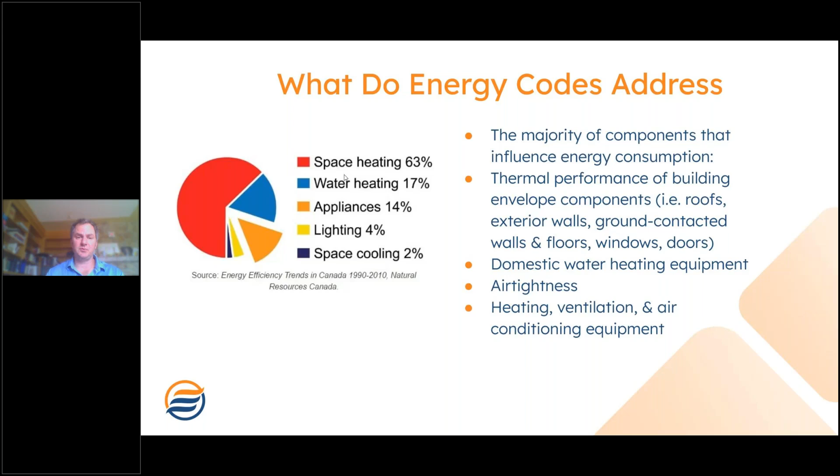It's only the National Energy Code for buildings between 9.36 and the NECB that applies to lighting, but energy codes are always interested in space heating, water heating, and space cooling. And so they're always going to be addressing the building shell, the building envelope, the thermal insulation parameters, the space heating and cooling appliances and equipment, and the domestic hot water heating.

So this slide sort of reflects the crux of what we're trying to talk about here. So why are energy codes a big deal? I mean, biased from an energy consultant perspective, but when employed with intent, they're like the gravitational force that pulls the different disciplines together. Because, as we just discussed from the last slide, energy consumption is influenced by the whole range of aspects in a building. If we're trying to achieve a particular end result or a particular performance, that's necessarily going to require collaboration and conversation, ideally at the front end, to ensure that the project is on track to hit those targets from the beginning. So in short, energy codes certainly can, and ideally do, drive an integrated design process.

So here's a slide that's basically highlights from the experts, just reinforcing that point. This is a little excerpt taken from the American Institute of Architects, where they're contrasting the benefits, or the absence of benefits if we don't take an integrated design approach. I think this is probably a pretty straightforward concept, but really it does make a difference. And the reality is that an integrated design process is just not always employed.

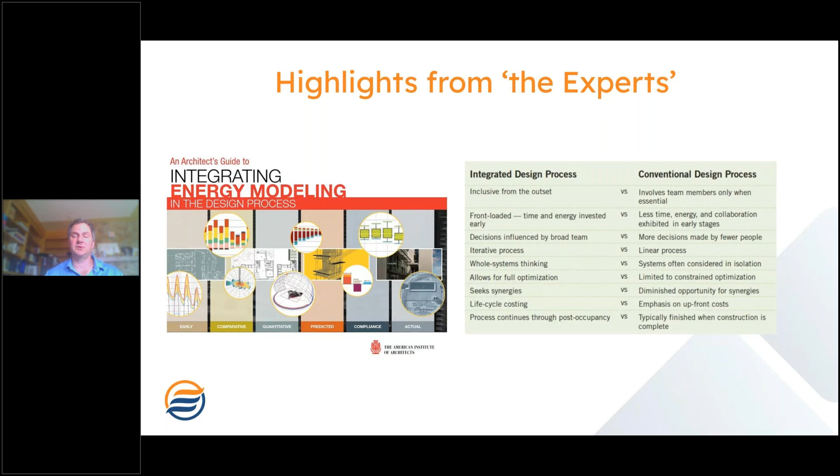Key advantages on this integrated design list that I would point to would be decisions influenced by a broad team. So even if we have an orientation towards high energy efficiency, let's say we're totally convinced that heat pumps are a great application for a building, they reduce overall energy consumption, we still don't want to be making design decisions about that system in a vacuum. This image here does a good job of pulling out the different facets and makes it a little easier to see how they would correspond.

If a house is planning to put some solar PV on there, well, how much of the annual energy do we want that solar array to produce, to be responsible for, to generate? Well, that depends on the overall building envelope's thermal insulation. And even if we've got a great technology like heat pumps, it is often the case that some of this more advanced technology is more design parameter sensitive. Air source heat pumps, for example, do have reduced output capacity during periods of colder weather. They generally have less overall heat capacity than, say, a furnace. So their sizing ought to be taken into consideration with the building as a whole.

Okay, so before we get into the discussion focused on 9.36, I thought I would just give a broad 30,000 foot level view of what's out there. 9.36 energy efficiency is certainly not the only energy game in town. For buildings that do not fall under Part 9, which I'll discuss in a second, by default, typically in most of Canada, the building would be called a Part 3 building and would be subject to the National Energy Code for Buildings.

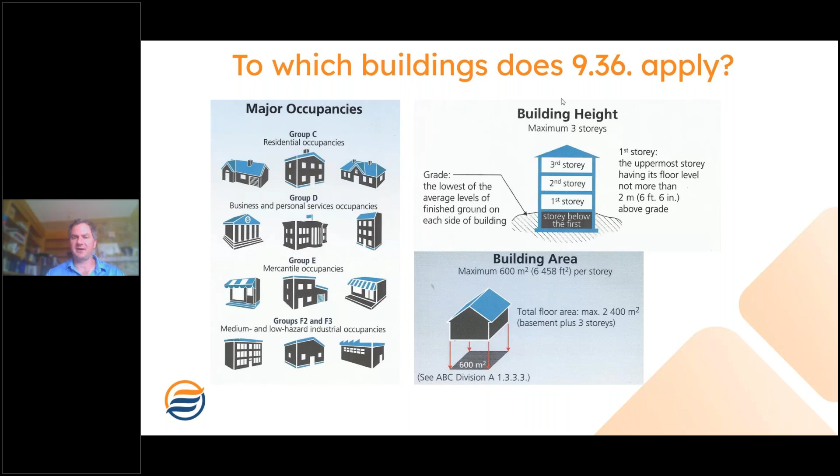So that's 600 square meters. If you had a 3-story building, you could have up to 1,800 square meters of gross floor area, but that footprint has to be 600 or less. Okay, so now we know what buildings fall under Part 9.36. So as I was saying, Part 9 is where they jumble all of the requirements for a particular kind of building into one part.

That would include a section on ventilation, a section on structural requirements, crawl spaces, all the things that fall under Part 9. Well, Section 36 of Part 9 is energy efficiency. So just to give a high level of the structure of Section 9.36, the first subsection talks about what we just talked about, what kind of buildings does this apply to, and how do we demonstrate compliance. And then the next 4 sections are about the modes of compliance.

So these modes of compliance that I'm going to discuss here next, this really is almost universally true, regardless of what energy code we're talking about, except for, I mentioned the step code, those work more on an energy budget, depending on what kind of building you have. They'll say you're basically given an energy allowance per square foot.

But for the most part, most energy codes, including the NECB, ASHRAE 90.1, generally offer these 2 modes of compliance: a prescriptive path and a performance path. And I'll get into what those 2 things mean. So prescriptive, and I'll be reiterating this point in a subsequent slide, think like prescription. You go to see the doctor, he gives a prescription. The pharmacist just adheres to the prescription, makes sure that it's followed to a T.

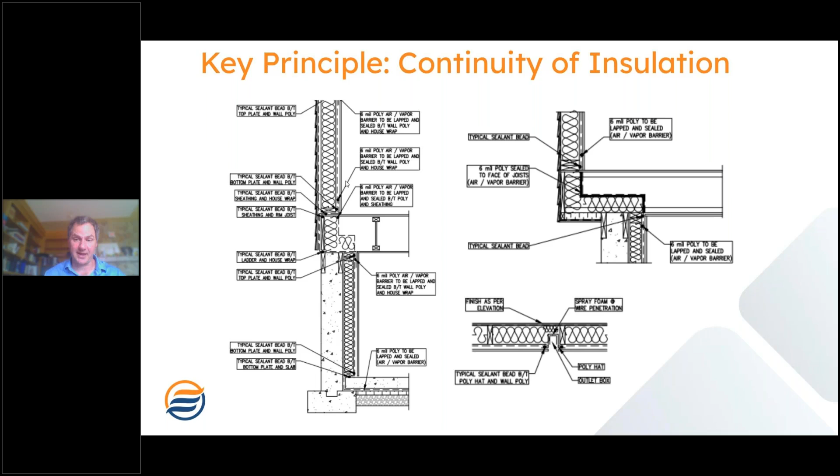The second core principle, which definitely applies to both the prescriptive and the performance, is continuity of air barrier. Actually, I didn't know this until some time ago, but ASHRAE 90.1, that American standard that's been in place for a long time, one of their requirements is actually a drawing package that has a red line section where the designer has to demonstrate how their air barrier is being maintained.

And so, air barriers is its own conversation. There's different kinds of air barriers. There's exterior air barriers, there's interior air barriers. Sometimes your interior air barrier is also your vapor barrier. But the point is, when we have this exercise from the beginning, it forces us to examine and really plan our details of how we're putting something together.

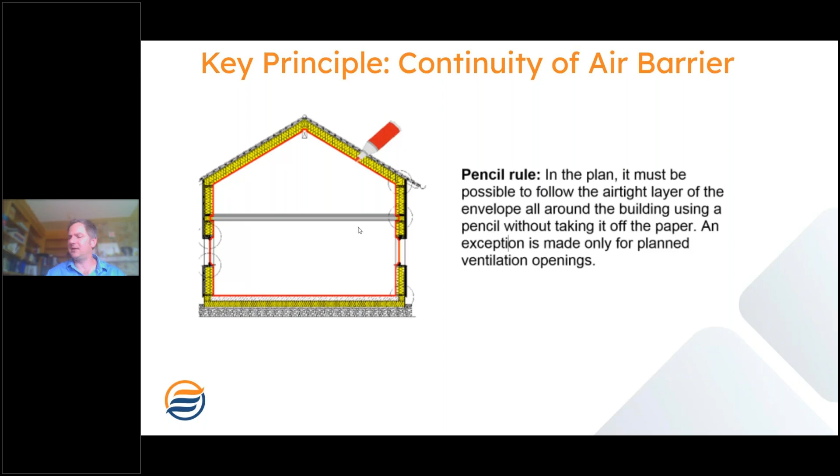So, I don't think there was ever this much focus on air barriers before energy codes were widely adopted. We know that air tightness is a very substantial contributor to energy consumption, and so this is definitely a facet of the energy codes that lead us to better buildings.

So now we'll talk about the structure. Whether we're talking about the modeling rules or the prescriptive requirements, the requirements of 9.36 are organized generally in terms of heating degree days, or in simpler terms, maybe the coldness of the location.

If anyone ever wondered what a heating degree day was, well, it's the middle of summer right now, so it's probably above 18 Celsius in most places where people are watching. But let's just say the average temperature today was 0. So 18 Celsius is the presumed indoor temperature. 18 minus the average 0 is 18. That would be the number of heating degree day points from today. And then they add that up on an annual basis, on a per location basis, based on their climate.

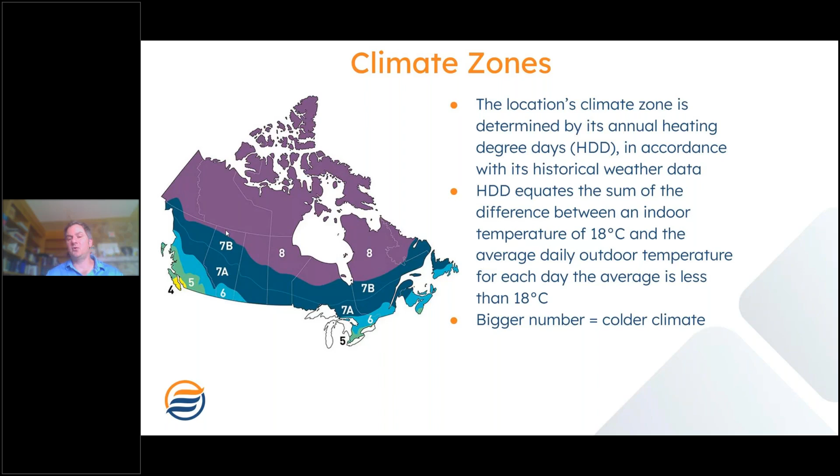And then you get bands. So climate zone 4, for example, is anything that's less than 3,000. 5 is 3,000 to 4,000, and it generally goes up in 1,000 heating degree day bands. The higher the number, the colder the climate, and correspondingly, the colder the climate, the higher levels of insulation are required or employed as the reference target for the energy modeling.

So while I don't know how new some of these concepts might be, at the end of the day, they honestly are straightforward. We're talking about making sure thermal insulation is continuous, that your air barrier is continuous. If we're going to be taking the more simplified approach, the prescriptive approach, there's only one little math component here, and that is that the thermal requirements the code identifies are always speaking about effective thermal resistance.

So in this example here, probably the most standard wall in conventional wood frame construction would be a 2x6 stick frame R20 wall. Well, in reality, that wall doesn't perform at R20. It performs at something closer to 15.8 for a couple of reasons. As soon as we take that 6-inch batt insulation and squish it a bit so that it fits into a 5.5-inch cavity, it goes from R20 to R19.

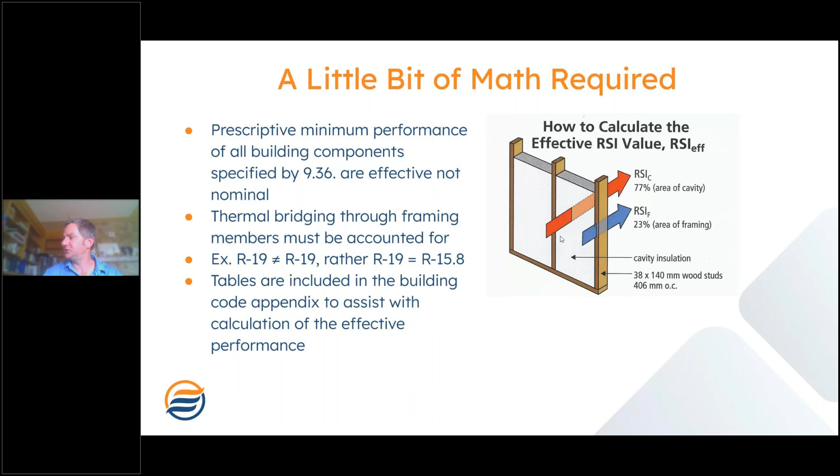But like this image nicely shows, there's going to be two different pathways for the heat to flow out. One is going to be through the wood framing member, one's going to be across the batt insulation. And compared to the batt insulation, the wood is a much quicker route, or a path of least resistance, what we call a thermal bridge. And so we have to account for that.

This is the equation. For the most part, we're just adding up the thermal resistance of the components in the assembly, with the exception of a parallel resistance calculation for how we area weight average the effects of the cavity insulation and the wood frame.

So this is something that often, probably most builders would lean into the support of an energy advisor or an energy consultant, whether for the prescriptive path or the performance. But I would say, genuinely, this is not rocket science, and it is pretty much the full scope of the math, for anyone who would find this to be intimidating. There are quite a bit of resources there in the appendix to help walk you through those calculations.

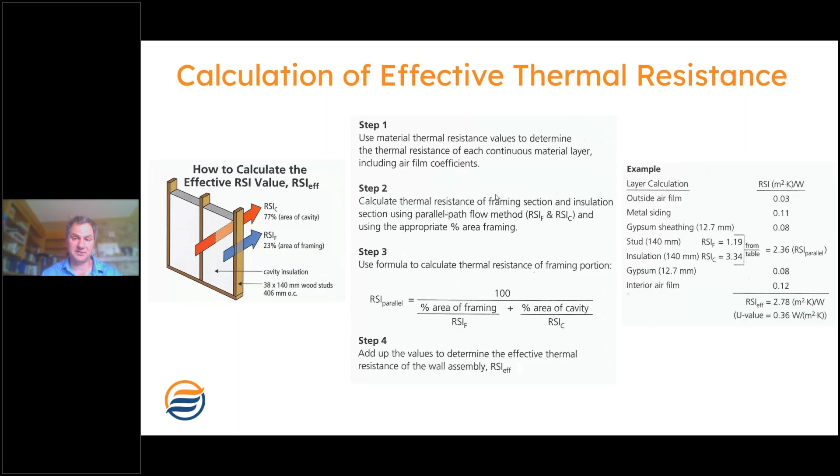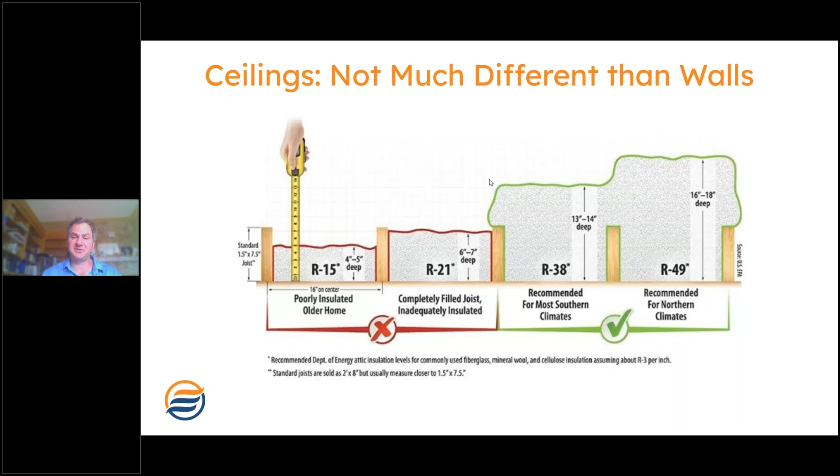And so I had the example there of the wood frame wall assembly, but this same principle would apply to any opaque envelope assembly that would have some framing members in it, which is to say a layer where there are two different materials. And so we have to account for how the heat flows through them on average.

Okay, so now that we've kind of built the framework of the universally governing principles or requirements for both the prescriptive path and the performance path, we're going to focus in on, okay, what does it mean? What does it mean if we take the prescriptive path? Well, I already outlined sort of my canned anecdote about the doctor and the pharmacist.

So that's true. Again, prescriptive compliance is essentially a checkbox activity for everything that the code says that you have to do. You've got to check, make sure that it's done, and that does include preparing some calculations to show that your envelope assemblies meet the RSI targets that we'll be kind of cruising by here in a minute.

I would say that you could characterize the prescriptive path as being rigorous but straightforward. So depending on the specifics of your project, there could be any number, a dozen or more requirements that you have to check. The performance requirements of the HVAC equipment, calculating all of your thermal assemblies, but it is straightforward. At the end of the day, as long as you do all the things, then you're compliant.

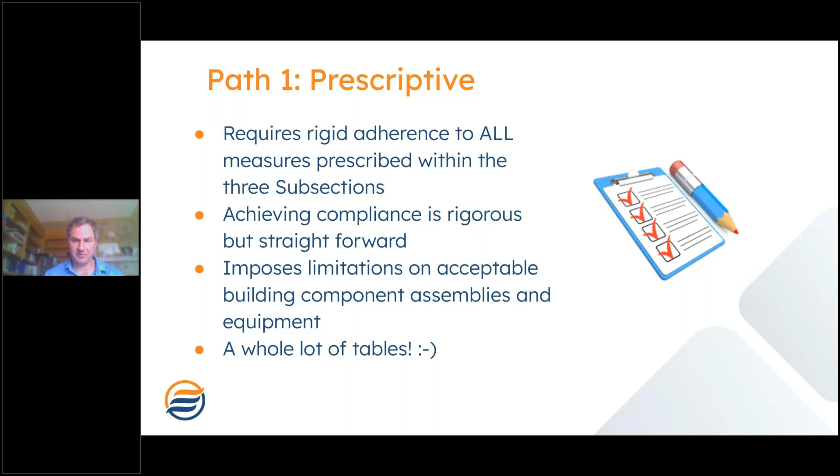Okay. And so now we're going to give sort of a broad look at what sorts of requirements are imposed using the prescriptive method. So here's a couple tables here. Effective thermal resistance of above ground opaque assemblies. If you recall, I was talking about the climate zones. So we've got these different RSI.

Oh, and by the way, R value is imperial. Everybody's heard of R20 batt insulation. Well, in RSI, that's 3.52. So they're interchangeable, there's just a conversion factor. We live in Canada. This is metric. So all of these tabulated values here are RSI. You can see as we go across the climate zones, we go from warmer to colder. For certain components, we can get quite a wide range of requirements.

I don't know if most of the people are in Alberta. Most of Alberta is climate zone 7A, with 7B being for the northern region, very southern Alberta being zone 6. So ceilings below attics in a house without a heat recovery ventilator would be an RSI of 10.43. That's very nearly R60. And if the building does possess a heat recovery ventilator, that insulation value is reduced to 8.67.

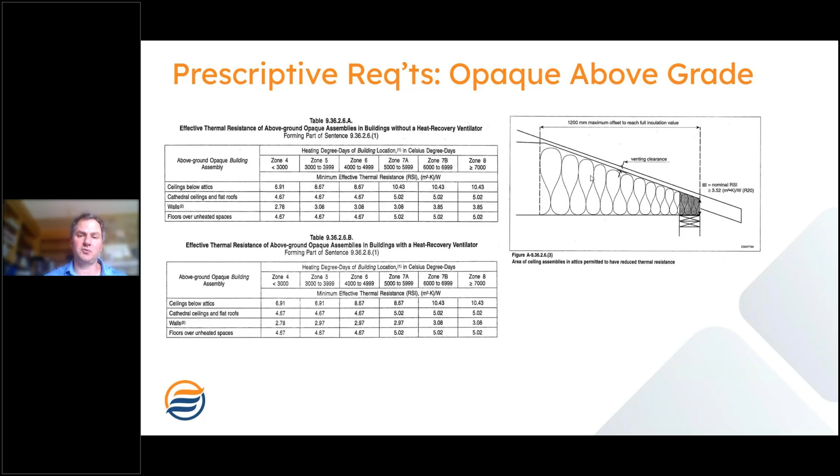And with many of the different details, there are some prescriptive requirements that identify particular details that must be adhered to. This one here is showing that over the exterior wall at the heel of the truss, you have to maintain a minimum of RSI 3.52 or R20, and that would be to avoid ice damming.

So just a little construction detour here and a little polling check-in, since I mentioned in that last slide that there were two different insulation requirements, depending on whether the home possessed an HRV or not.

Okay, so you know what? I didn't put it on there, but there's HRVs and ERVs. So maybe even there's something for the seasoned consultant to learn. HRV stands for heat recovery ventilator. ERV stands for energy recovery ventilator. You're like, well, I thought heat was energy. Well, the distinction between the two is that when we say energy, we're including the latent heat, which is to say the energy that the moisture in the air carries.

So maybe I'll explain first what this box is. So Canada is generally a cold place, right? Hopefully we've all accepted that. The outside temperature is generally colder than on the inside. And we need to have good indoor air quality, right?

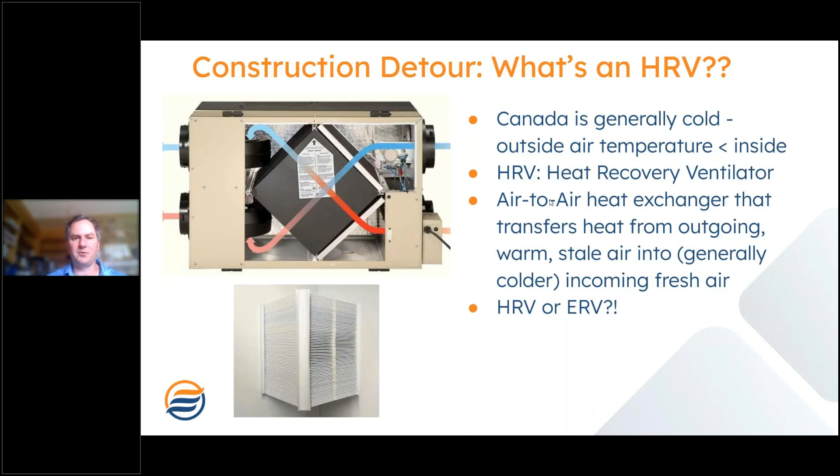So I hope if there's questions on that, I probably went on a little longer about that box, but I like to identify that one because, no need to be embarrassed, I encounter people routinely who are even building and still don't fully understand what the HRV is for. So that's it. So back to the prescriptive requirements.

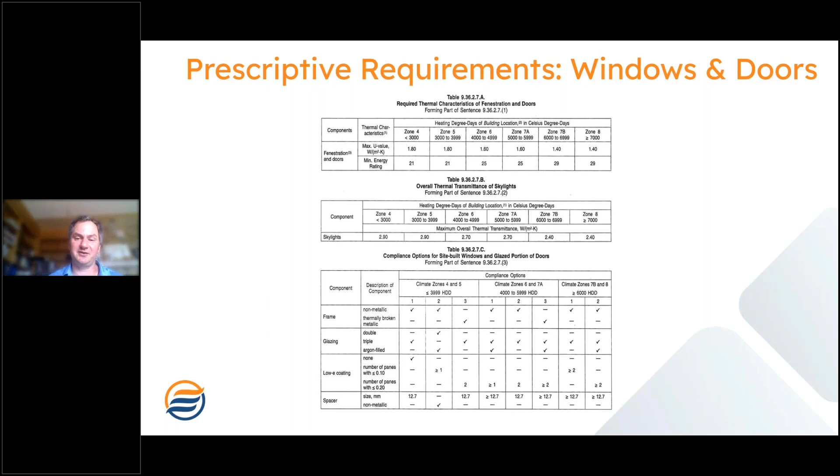Just like the thermal insulation for the roof and the walls, there's specific requirements for the windows and doors. Windows and doors are generally expressed in terms of U value, which for whatever reason is just the inverse of R value, or metric RSI, USI. More R value is better, lower U value is better. They're the inverse of each other. Yeah.

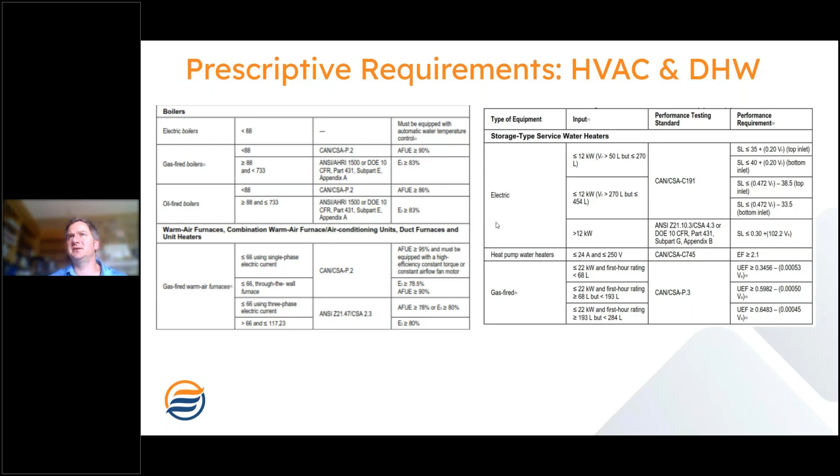Again, with the prescriptive path, with this checklist activity, we've got HVAC equipment, we've got hot water heating equipment, which again needs to meet the requirements of the tables, whether that's undertaken by yourself or prepared by an energy consultant. It remains that checklist activity. And I will say that the municipalities are pretty accommodating in making that exercise relatively painless, which is to say you don't have to invent your own paperwork for the most part. Most municipalities have forms that you can fill out. You have to know how, of course.

And I would say, well, I know there's some, if some of the municipality or First Nation representatives here have not yet implemented the 9.36, I've definitely seen some municipalities borrow the forms or base it on templates from their neighboring facilities. There's no need to reinvent the wheel.

So hopefully I've done a reasonable job of conveying to you the fundamental mode of compliance for the prescriptive path. That's one of the two main approaches to demonstrating energy compliance. And as I said, just to recap, because we're trying to convey how this can be used as a strategy to build better buildings, even though it is, in no small part, a checklist activity, and can be undertaken in sort of a siloed approach, all the better if we still have those conversations across disciplines for the unavoidably and truly overlapping aspects such as the insulation, continuity of the air barrier, mechanical design, and the like.

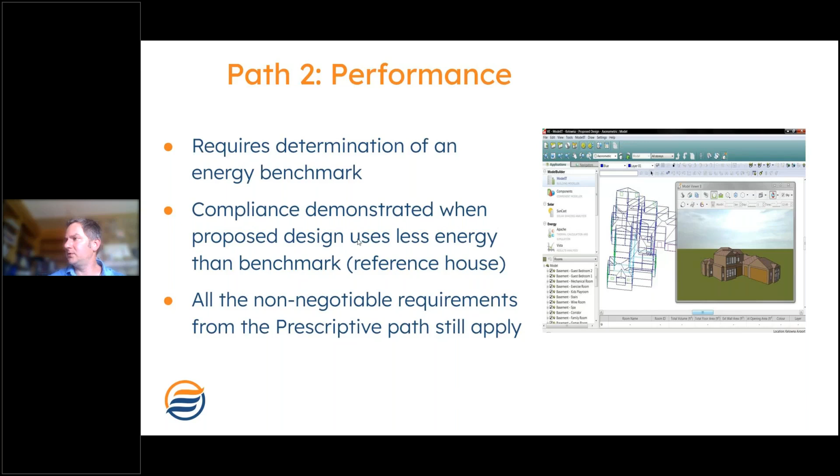What are some of the advantages of this approach? Well, it provides more design flexibility. I would also say it is even more so a collaborative tool, because in contrast to the prescriptive path, where at the end of the day you get a checklist, with the performance path you get some sense in quantified terms of how much energy the building is going to be using relative to the benchmark.

But beyond that, some of the prescriptive requirements, one of them that comes to mind would be slab insulation details. One of the boxes that we have to make sure that we check when we're using the checklist approach. If we use the performance path, because it's concerned with the building's overall energy consumption, so long as we can quantify properly any deviations from the prescriptive path, we can tune our design. So let's say that slab insulation was just, for whatever reason, going to be a terribly cost burdensome component for a project.

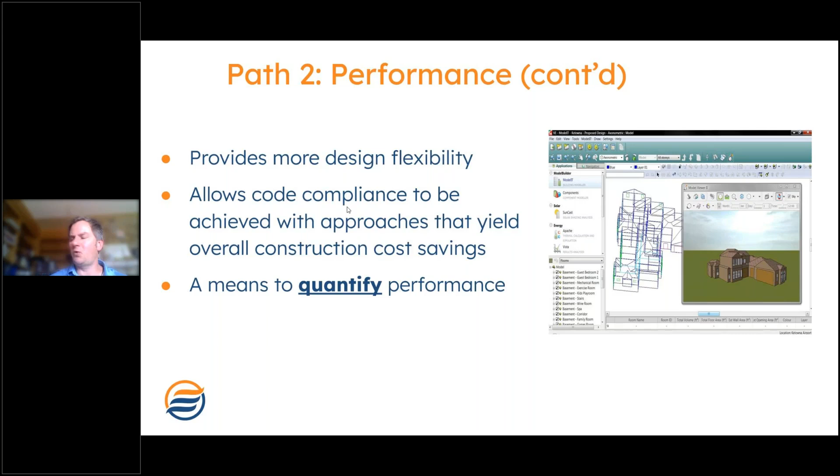Because slab insulation, or the lack of it, can be properly modeled, you could potentially model it out. Now, you could take it out if your model showed that the proposed design still used the same amount of energy or less than the reference case. Now, to be clear, I'm not advocating for eliminating insulation, but certainly design flexibility and even marginal cost savings has been one of the key drivers of using this approach. But the quantification is definitely an advantage too.

And what I'll say is that in the jurisdictions that we're operating in, there's quite a number of rebates and incentives. No doubt, many here are familiar with the ongoing CMHC programs promoting multifamily construction, a program called MLI Select. Almost all of those programs are requiring an energy modeling based approach so that we can properly quantify, relative to a benchmark, how energy efficient our end result is.

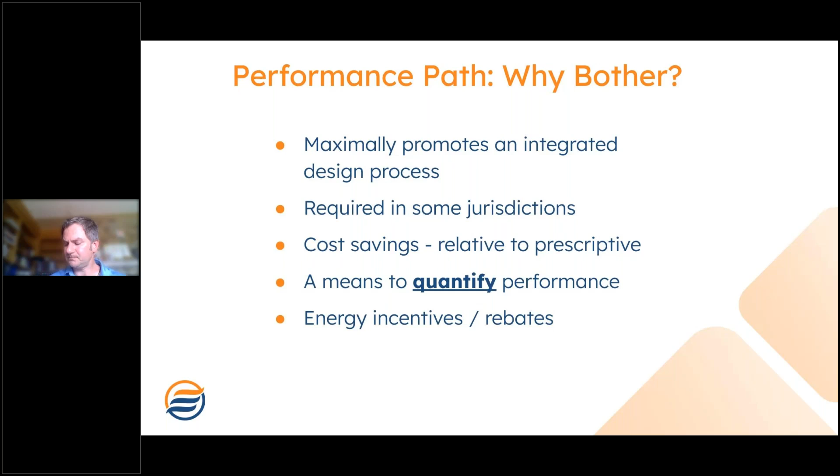Okay, and that's aside from the fact that it is also a requirement in some jurisdictions, pointing back to the step code there; the approach that they're taking there intrinsically requires energy modeling. And okay, so this is actually the last slide before we'll take some questions here.

Haley, you can put up the question about airtightness. I definitely know all the energy advisors are very familiar with airtightness testing. What this is meant to touch upon is the advantage of the performance path and sort of the whole building approach that it enables. So in the energy model, one of the assumptions that we have to make is how leaky or how airtight, if you want to put a positive spin or a negative spin on it, the building is.

But one of the ongoing criticisms about energy modeling is, how do you know that it reflects anything like the real world? And that's a fair criticism. You can build the most energy efficient home, and if we leave the windows open all throughout the winter, well, we're probably not going to attain the predicted energy performance that we had hoped for. But occupant behavior is not something we can control. We can only control the things that we build. And one of those things is the airtightness of the building.

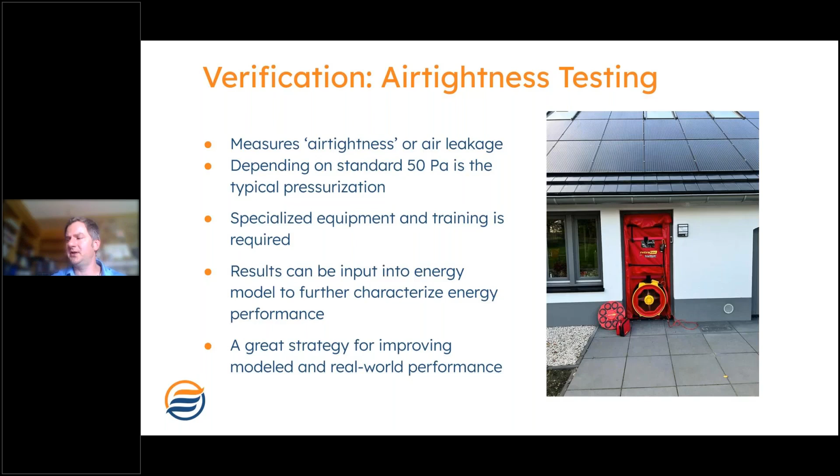And so airtightness, while that's a conversation of its own, it certainly kind of rounds out the high level of this integrated design process and some of the merits and the strategies that we can employ when using a performance path-based mode of compliance.